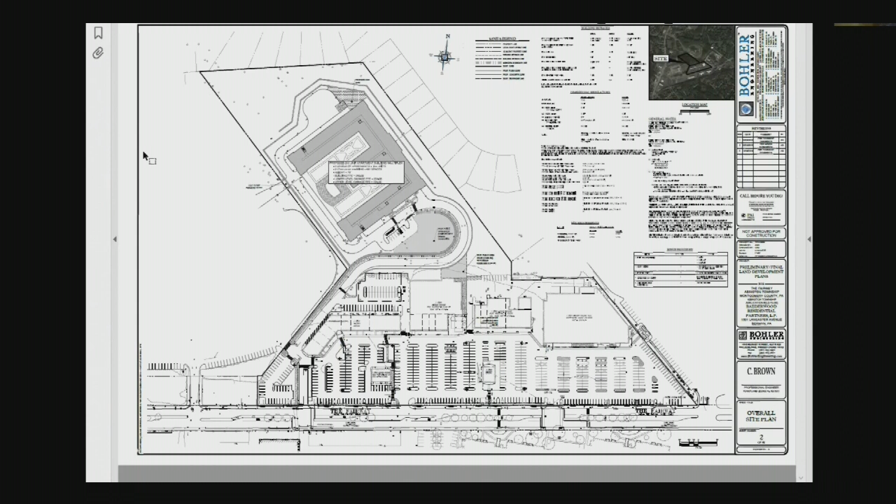Sure. So as Mark said, the easternmost access was modified. You can see on the bottom right-hand corner of the screen there, Ashley, if you can maybe zoom in a little bit. This was the approved conditional use plan. You can see the location of that easternmost access, that signalized access. That's been modified. We can talk about that when we bring up the current plan.

Ashley, if you can pan over to the left-hand side of the sheet. This westernmost signalized access, some modifications were made interior to the site, closer to where the bend is in the strip retail building. There's also been modifications to the lighting within the shopping center. And then the biggest change as it relates to fire access is the driveway that makes its way up to the apartment building. So if we can switch to the more updated plan, we can talk about that in a little bit more high level detail.

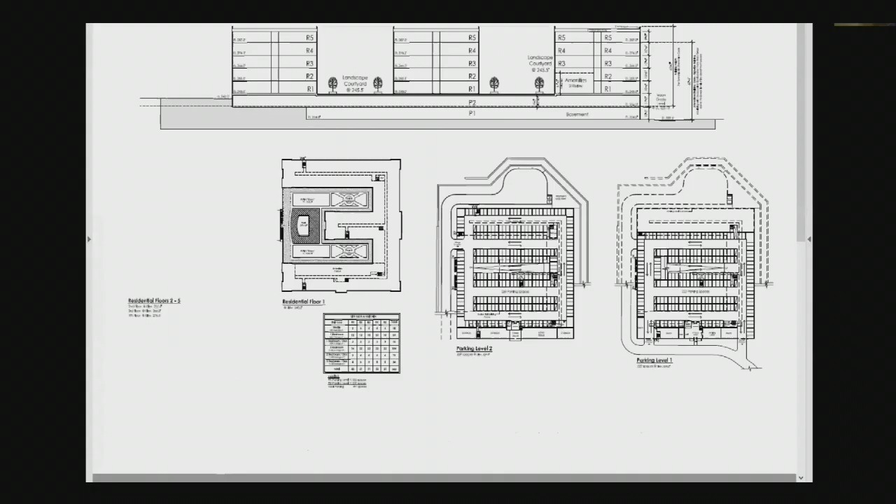Sure, I'm going to go through the documents I received and let me know. Is this one good? Yep.

If you could zoom in to that bottom right corner again, we can work our way from right to left. You can see this access here has been modified. If you recall on the prior plan, that parking lot was still fully open and you had access across, running parallel with the fairway. So this access was actually shifted over, more to the west. We basically added concrete islands and created a throat to that signalized access point. This access lines up a lot better between the Whole Foods and the Baederwood Pharmacy, and provides a lot easier truck movement for the loading operations associated with the Whole Foods.

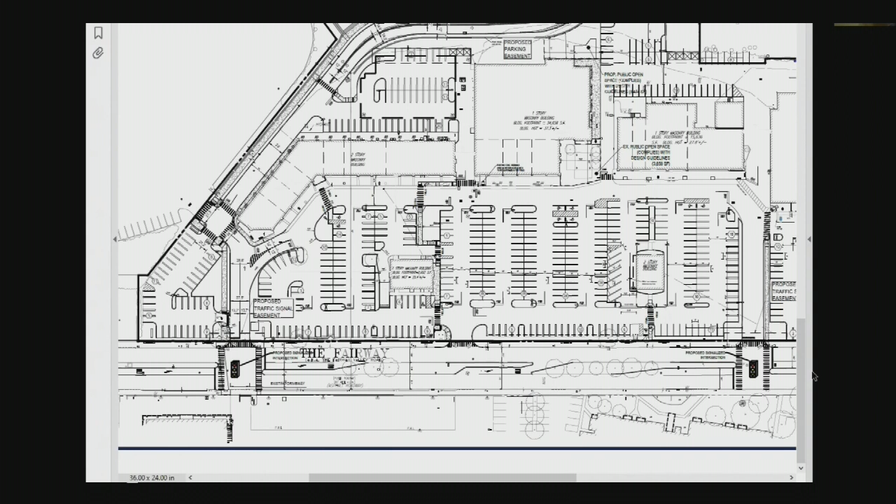If we continue to pan over to the left-hand side, you can see this westernmost access has been modified to provide for a more fluid movement for both cars and trucks accessing both the shopping center and the multifamily building. As I mentioned, you can't really tell on these plans, but all the lighting is also now proposed to be upgraded within the shopping center. All that lighting will now comply with the latest township codes.

And then really the big improvement that I mentioned is the driveway access up to the multifamily building. Actually, I think we have another slide that blows that up and provides a little bit more dimensioning on it.

Here you go. So the change we made here was providing a 2-foot wide mountable curb island down the center of the driveway, to provide for 2 separate dedicated lanes to the apartment building. So we have 2 12-foot lanes that widen out along the curves to ensure that fire trucks are able to stay completely within those lanes as they make their way up to the apartment building. You can see they're 2 12-foot lanes, but as you traverse through the curved sections, there's gore striping on each side of those lanes to provide a little bit more room for those trucks to maneuver all the way up, staying fully contained within those lanes.

Mr. Denolis, before you move on, can you explain a little bit more about what a mountable curb is in the middle of the road?

It's essentially a 2-foot wide curb that trucks would have the ability to bump over. You typically see them maybe in a shopping center where you have a right-out movement only, and you see those concrete islands that look like you can roll up them, but you really don't want to. That's basically an angled curb with a flat section of concrete in the middle of it. Thank you. Does that make sense?

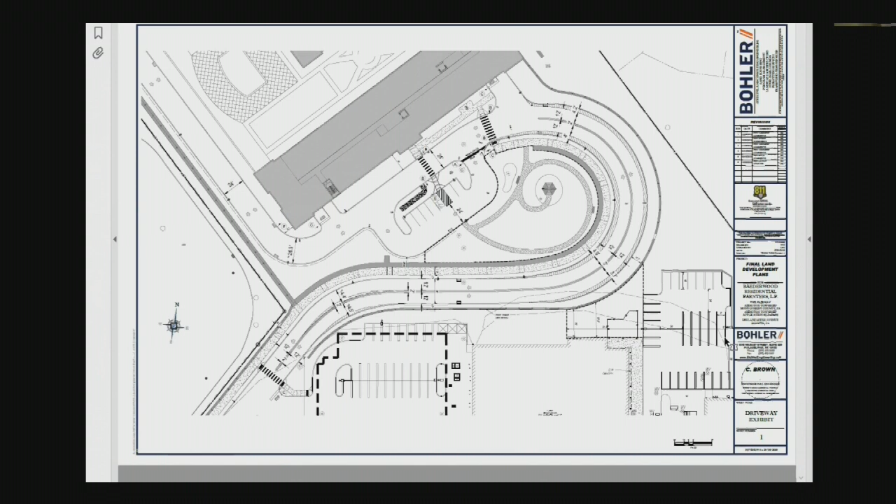The other modification that we made, it's not shown on this sheet, and we could possibly go back to that overall plan again, is at the rear of the multifamily building. We expanded on the turnaround at that back corner. You can see that large opening of asphalt in the rear there adjacent to the trash enclosure. So basically trucks will not need to make a K-turn movement to get back out. They can drive all the way up and make a full U-turn and make their way back down out of the site.

Speaking at a high level, those are the changes that were made on this last go-around since the last time this plan was presented. If there's any questions related to the site plan, please let me know and I can expand on that in further detail.

Okay, great. Thank you. At this point, I'm going to open it up to commissioners for questions, and I'm going to turn it over to Commissioner Weingrad first.

Thank you. I appreciate that. First, I want to start from the beginning about this project. It's a 244 unit apartment building that's being proposed, is that right? That's correct.

And are these apartments versus condos? Well, the method of ownership isn't really relevant. Right now we're talking about an apartment building that would be rental because there really isn't a great apartment condominium market, but yes, this will be a rental apartment.

Thank you. Talking about pedestrian access, what's the plan with pedestrian access to the building itself? So if folks that live in this building want to go down to the Whole Foods, how would they get there? There is a sidewalk that goes along the entire road going up. So they would come down this sidewalk and then come around, I guess, through the parking area.

Because of the grade differences, they wouldn't be able to make the connection until they got down to the parking lot behind the office building, the building that has the offices. So they could go all the way down to the front of the center. They were going to Panera Bread or something, but they could also cut through between Panera Bread and the fitness club.

Now I want to ask you about the fairway itself. I wanted people to understand that there are improvements to the fairway as part of this plan. So, Mr. Kaplan, would you be able to talk about that? I can do that, Mark.

So this site, as you know today, has 4 access points that are all full access. There's the one all the way to the east that's next to Rydell Park that has full access, every movement. There's the next one that also goes right in front of Whole Foods, full access. There's the one that kind of goes towards Panera Bread, full access. And then there's the western portion that's full access.

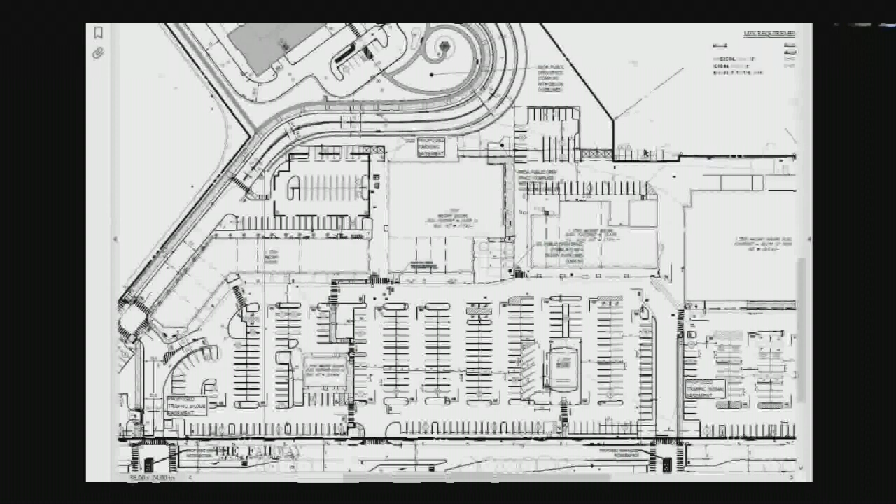Through a lot of talk with the engineers and the traffic engineer of the township, there was a lot of discussion about trying to limit the amount of access. So what we did is on the access closest to Rydell Park, it is now only a right in, right out. We're extending the fairway median so you can't make a left in or a left out there, because there's an entrance for Rydell Park right there, and there's a lot of conflicting movements.

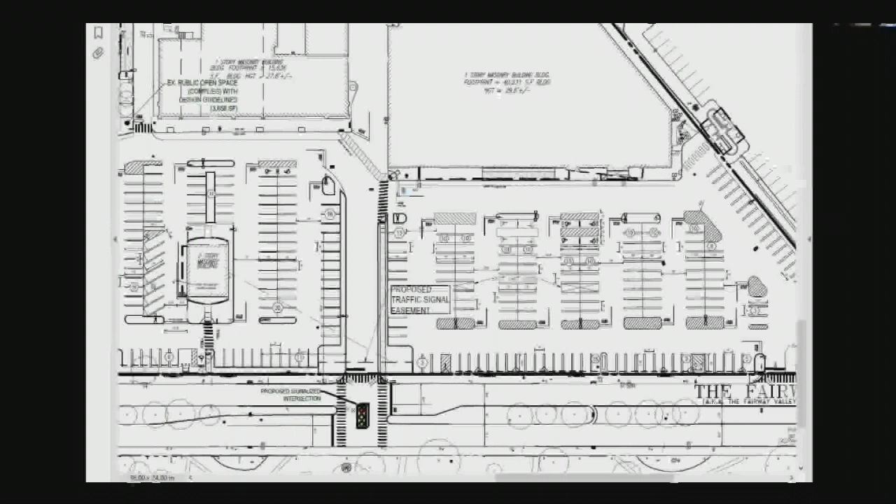So the next access along the fairway is now the new traffic signal we just talked about that will take you right into the Whole Foods. That's signalized, and it'll have pedestrian crossing signalization. Right now there are 2 pedestrian crosswalks on the fairway. We're going to eliminate both of those and direct pedestrians to the traffic signal, where there'll be controlled access across by the pedestrian crossing.

And then if you continue west a little bit, the entrance currently in front of Panera Bread is a full access. Once again, we're converting that to a limited access, so you go right in, right out. And then if you're coming down the fairway east, you can still make a left into the car dealership across the street. We maintain that so when the car dealership, if and when it someday gets developed, it still matches up. And then lastly, the last entrance, which is the primary, let's say, residential entrance.

Once again, this is a fully signalized entrance. That's an improvement over today, which has full access with no signal. So I would just add one comment, Commissioner.

After we got our variances at the zoning hearing board, we circled the wagons with the township. It might have been the first meeting I was with Rich Manfredi, and Brian Keaveney, your traffic engineer, was there. I think it's fair to say, and Brian will correct me if I'm wrong, there was a lot of interest in us limiting the accesses, making the whole area along the fairway more controlled.

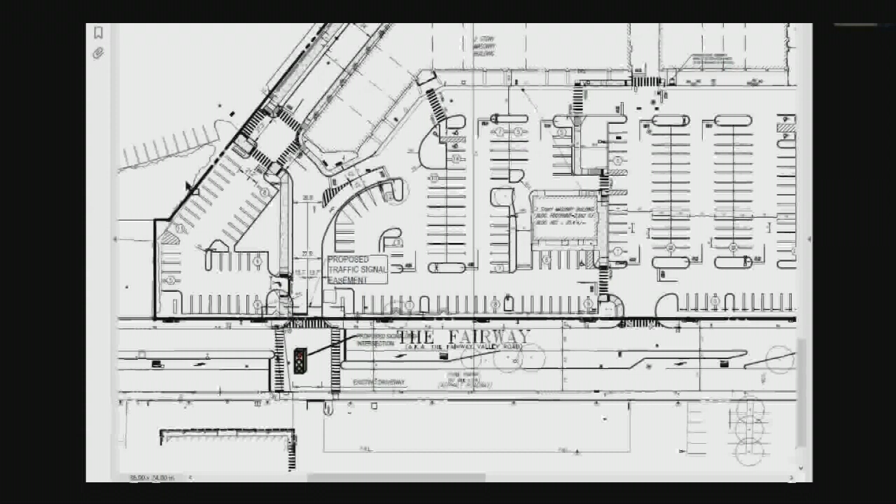So we're pleased with it. But in terms of crossing the fairway, will there be 2 access points or 2 crossings with a crosswalk, or 1? Two. You'll be able to cross at both of the signalized access points. Okay, it'll be the kind of thing where you push a button, the light turns red, and you can cross? Yeah, that's right.

I mean, we're not going to... do you want to get into fire safety now, Mr. Kaplan, or were you going to wait to call your expert on that? Well, you guys got to tell me what you want to do. I sat with Drew Gerard today and we went through all of the different things that are included. If you'd like us to walk through all of them, Drew's here, he's very articulate, he knows his business, and we can do that. Your choice. I'll leave it up to Chair Thompson, how he wants to conduct this.

Mr. Kaplan, I think we would be interested in hearing that. I think we just need to keep it concise and make sure the average person can understand what he's talking about in terms of engineering jargon. That's why I met with him today. I wanted to hear what he was going to say, and I didn't want it to be the first time when we were here. So he can do that.

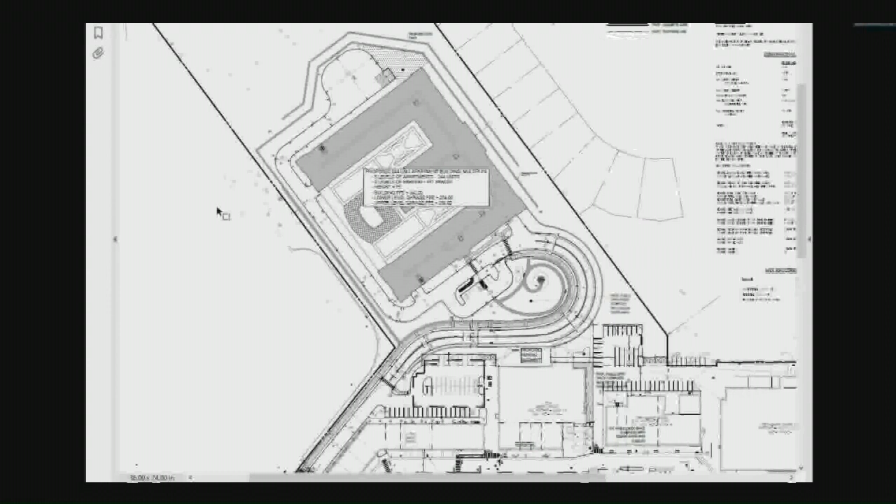And a second thing we did with the site— Gerard, on that one, Ashley, can you direct her to where that is on the site plan? Yep, so it's on the north side of the building there. The actual egress stairwell is shown right there at the left end, so the hydrant will be very near that door on the building side of the access road—right in that vicinity. Final location to be determined, but it's going to be within 50 feet of that door. The fire department connection will be on the wall of the building right next to that stairwell as well, giving them the option to stage their first trucks on scene at the front or rear of the building, depending on what they know about where the fire is in the building.

Perfect. So does that help? It does. Sure.

The other thing we did with the site improvements is optimize the underground water line design to provide as much water as we could for firefighting. We're providing around 3,000 gallons a minute to the fire hydrants, which is well in excess of the code minimum, which is in the range of 1,000 to 1,500 GPM. So we're providing ample water supply to these guys when they're on scene.

So that's the site stuff. Within the building, we're proposing multiple enhancements that include a fire command station. We're increasing sprinkler protection, providing a more capable fire alarm system, smoke removal fans, increasing ventilation rates in the parking garage, and providing emergency responder radio coverage.

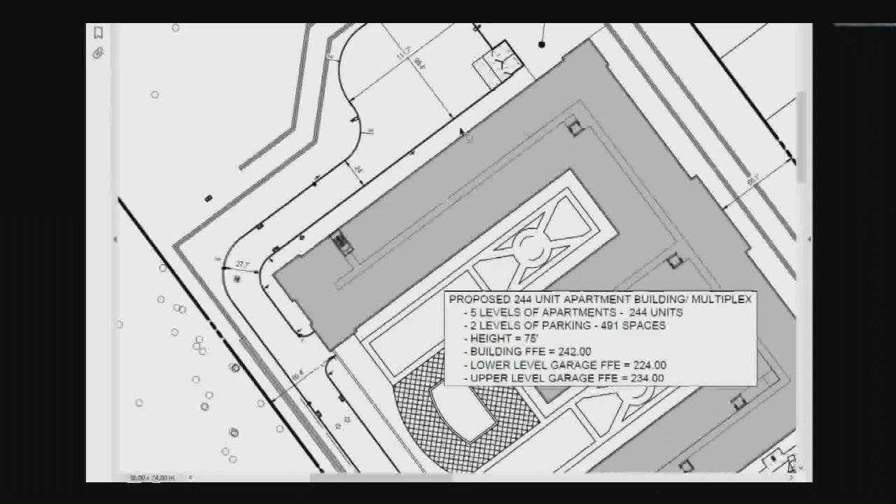If they have a central location to access all the fire equipment and the building plans, it's a staging location for a fire incident. That is going to be on the ground level, the fire department access level, as they first enter the complex. I don't think the final location has been fully coordinated, but it'll be on that ground level as they first approach the building, as they turn up the access road, right along that sidewalk adjacent to the building.

In addition to that, the sprinkler system is one of the most effective ways we have to provide occupants with extra time to get out of a building. The fire sprinkler system is designed to control the fire, keep it in check, and we have proposed within the parking garage to increase the amount of water that's discharged. This means we're going to provide more water per square foot to control the hazard. The area of greatest fire hazard is this parking garage, and that's why we're focusing on this.

It's also the foundation of the building, so we want to make sure that it's absolutely protected. This is another area where we're going above and beyond, both to make sure that the firefighters are safe and the occupants are safe.

The upgraded fire alarm system we're proposing is not what you're probably used to seeing. It utilizes a voice evacuation prompt rather than horns and bells. This system can provide the tenants with a verbal description of the emergency and specific instructions. It's also able to be used by the fire department as a PA system so they can put out unique messages, both to the tenants getting out of the building as well as their firefighters. So it effectively makes more useful communication during an emergency incident.

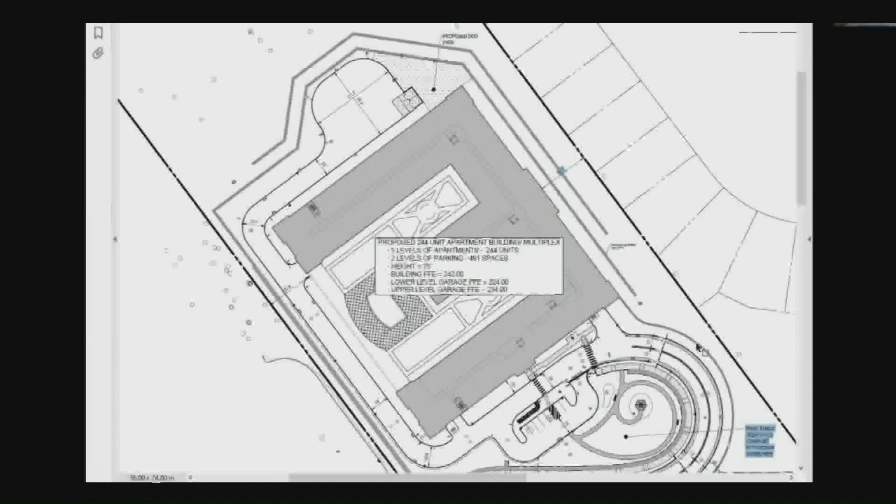So with the egress or the corridor, if you pull the drawing down so we can see the footprint of the building, the corridor pretty much follows that dotted line that runs through the center of the structure. We see there's basically three entrance points from the stairwells, and then you've got the elevators. It's going to be a challenge for the fire department to get in there with any equipment to do a post-incident purge of the smoke. So imagine if we have a fire in an apartment unit on the top level of the building — they've got a long way to go to get fans, and they'll have to create an exhaust point as well as an intake point for fresh air.

This system we're talking about installing is basically going to have a shaft going up through all the levels, with dedicated fans at the top of the shaft, so that when they're ready, they can kick on the exhaust fan and start pulling the smoke out of the corridor.

This is not an active pressurization system, so we're not trying to provide smoke zones through stair pressurization or zone pressurization. Now I'm getting technical on you — I apologize if this is too far — but these are different systems that both serve a very effective purpose for a fire department.

Thank you, Mr. Gerard. I'm going to ask Fire Marshal Rohrer a question here, because my understanding was that we were going to see positive pressurization in the stair towers on this. Am I hearing that we're not actually getting the positive pressurization on those stair towers?

And maybe that's actually better for you, Mr. Gerard. Well, I'll defer to the fire marshal if he'd like to chime in, but I'm more than happy to. I'm reading through right now, Commissioner, but I believe that was part of the discussion — positive pressure in the stair tower. That aided with the evacuation of personnel and also us coming in.

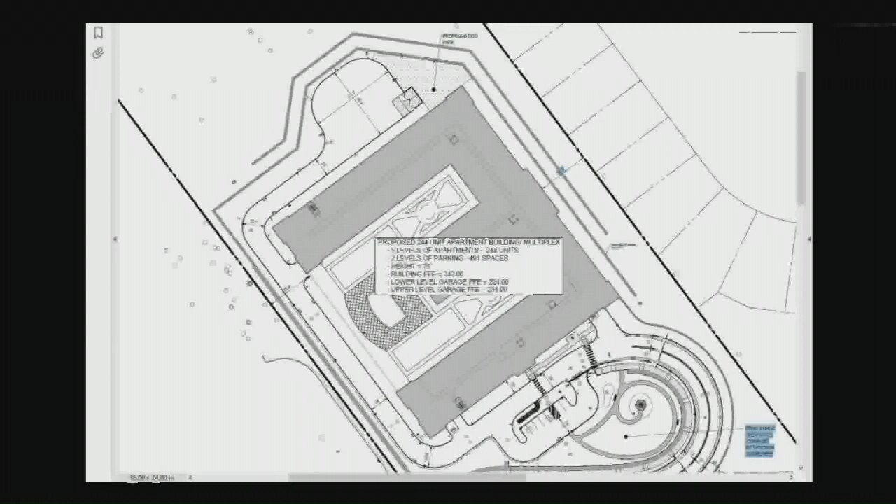The fire chief and the fire company walked away comfortable with all the suggestions and upgrades we came to. I'd also like to point out, regarding the driveway — if Ashley has the drawing and plot plan up on the screen, right at the top of that circle is where the original fire hydrant is located, right about where Ashley's pointer is now. Were that to be the only one, our first truck would block that roadway with fire hose. The addition of that second hydrant allows us to change our operations, allowing other trucks to access the scene a lot easier. So I just wanted to point out that was one large addition to this plot plan. Thank you.

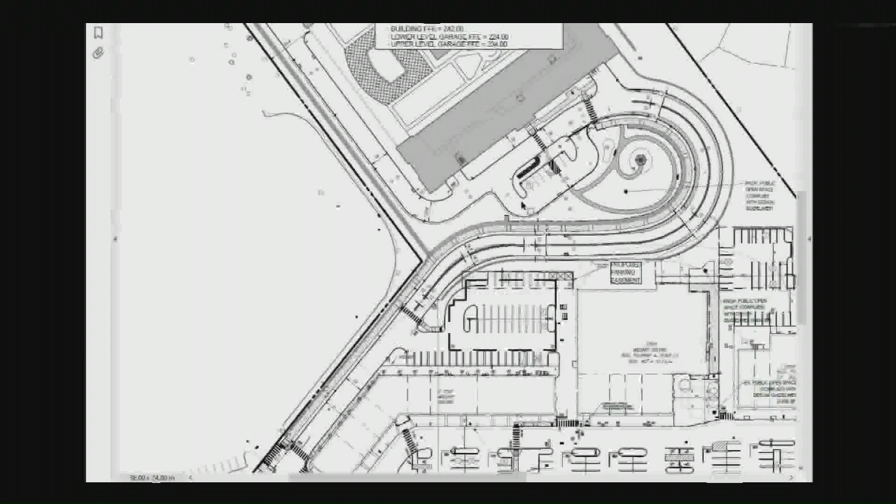Thank you. And Fire Marshal Rohrer, since we have you, what is your take on the building as proposed by Drew and his team? Do you feel that the building we're talking about tonight is safe for the residents and safe for your responders in the event of an emergency? Yes, I do. Okay, all right, thank you.

I'm going to ask one more question before I turn it over to the other committee members. Mr. Keaveney, are you on?

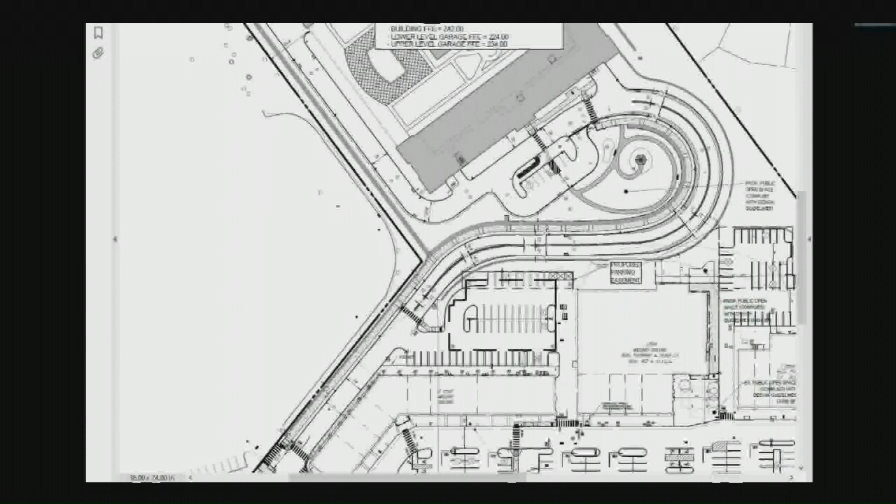Can you, as the township engineer, walk us through your assessment of the access drive up to the building? Talk about the width of the lanes, the concrete median in the middle, and your assessment of the turning radii as provided in the radii study that was provided to us by the engineers at Bohler.

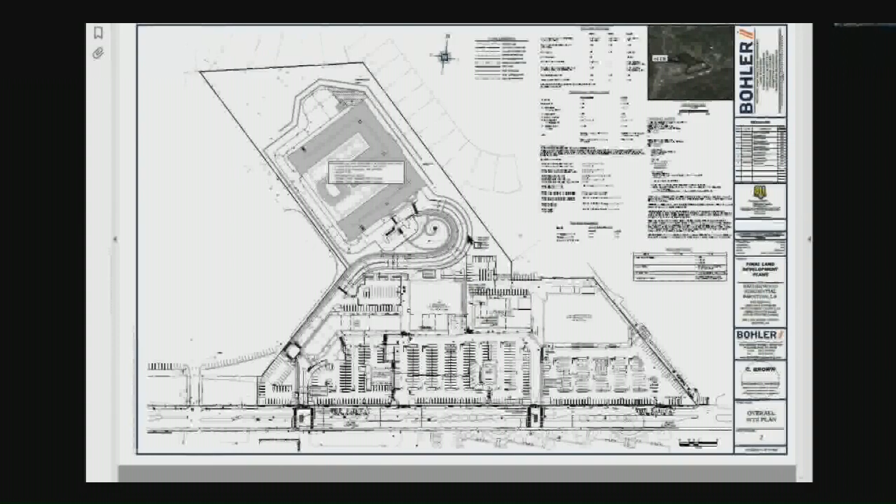Certainly. As was described, the original driveway was narrower than what's currently proposed. The applicant did take into account what I believe was the largest truck used by the fire services in Abington, a fairly sizable ladder truck. They used that maneuverability template on the drawing to scale to widen where they could to facilitate extra room around the curves. Upon leaving the straight section of the driveway, you have a curve to the right, and then almost a 180-degree curve to the left to get to the top of the ramp and the front of the building. Both of those curve areas have extra width between the center median and the curb line to facilitate that truck movement.

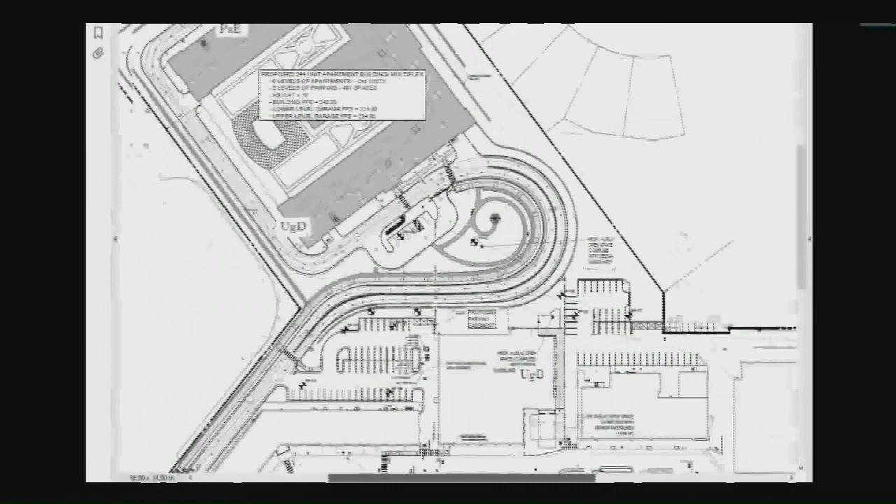Great, and Ashley, if you could jump to the other tab, the 45 truck. Yeah, this one actually shows the movement, correct? Great, and Ashley, can you zoom in on the fire truck that's on the right-hand side? No, the other side, to the right. There should be a symbol of the truck. Scroll up a little bit more and scroll over to the right side of the page. There you go, zoom in on that truck.

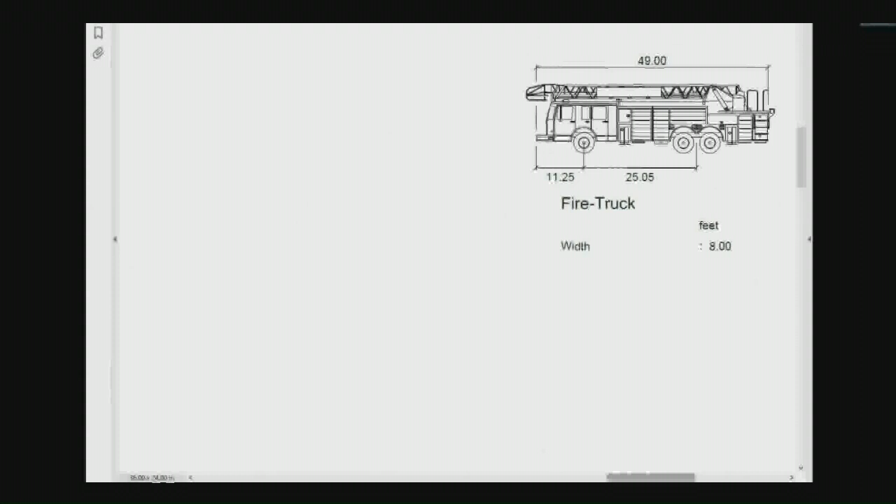Fire Marshal Rohr, does this look like the standard ladder truck that your fire companies would be operating should they arrive on scene? Yes, it does. Through the planning process, I provided the largest type trucks we have. All three ladders are Pierce Manufacturing, and all follow the same standard. Great, thank you.

Mr. Keaveney, just looking at the plans, it seems like this truck and any other trucks that any of the fire departments in Abington Township have would be able to successfully navigate these access roads and access the site. That's correct.

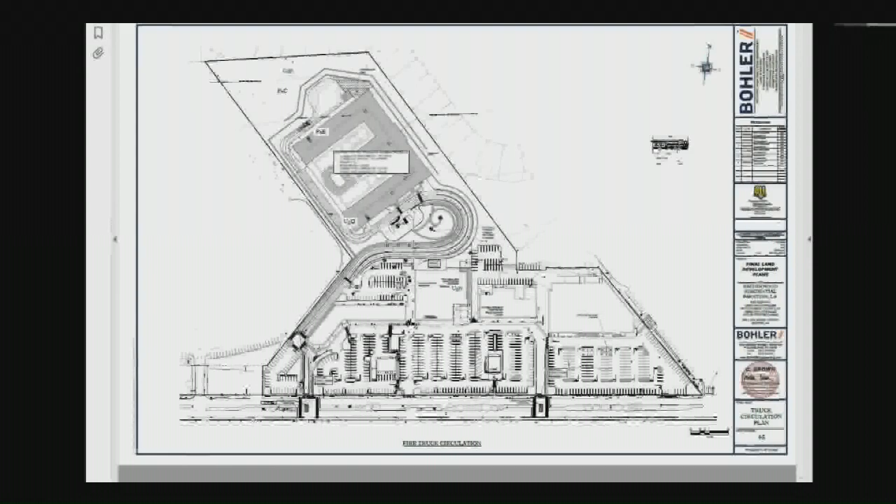Yeah, I think ultimately our obligation is to review the fire safety issues, and I'm satisfied that Mr. Rohrer has said he feels he could fight a fire in the building. The fact that it's sprinklered already increases its safety monumentally. So that's really all I think we have to look at to satisfy ourselves for the public safety and the safety of first responders. I'm satisfied, and I'm prepared to vote in favor of the changes.

Okay, thank you. Any other comments? Okay, Mr. Thompson, if I could just jump in for a second, if that's okay? Sure, go ahead. Mr. Kaplan, just to clarify, all of the issues in the various land development review letters will be complied with, is that correct?

Oh, absolutely, yes. And during the conditional use hearing, there was a discussion regarding if the township acquired a secondary access easement, that your client would be responsible for the costs associated with that secondary access, and that it's still a continuing obligation for your client, and you understand that, correct?

Absolutely, yes. Okay, and the condition of the improvements to the fairway, you would agree to those conditions being made part of any land development approval next week when the board votes? Again, yes. And finally, if the board were to grant the waiver on the secondary access, but make it subject to your client continuing to negotiate with the adjoining property owner in an attempt to secure that secondary access, you would agree to that?